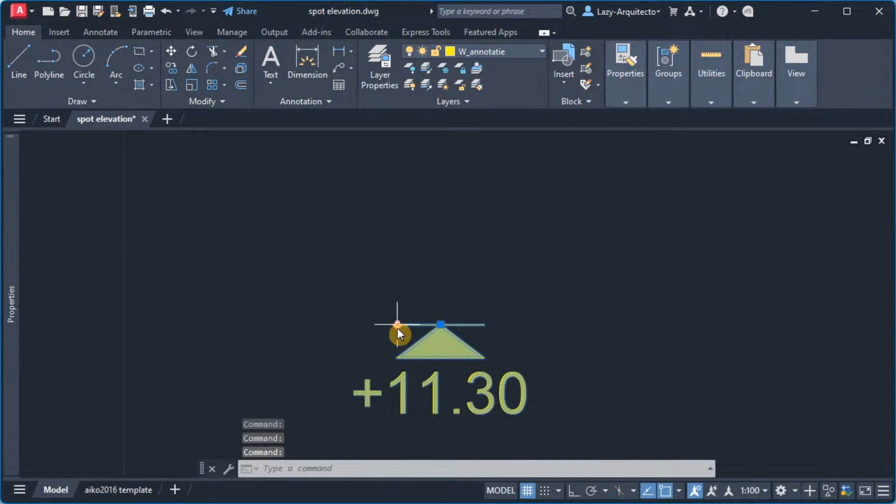Let's quickly see what this dynamic block does. We have a grip right here, okay so great, this grip is a flip parameter. That's nice, so we can quickly flip it without affecting the text. That's great, but...

The problem our friend was having is he needs to add a visibility parameter to change the scale of this block. So let's go ahead and open our block editor, by right-clicking on the block and picking Block Editor. And here we go, we are inside his block now.

So one of the first things I want to do here in order to quickly change the scale of this block is add a linear parameter from our Block Authoring Palette right here. If you don't see it, it's right here on your ribbon, you can also click on it to open it.

So again, my first parameter is going to be a linear parameter, and following the instructions on the command line, I'm going to start my first point exactly on the middle of the block, like so. Then I'm going to constrain this using ortho mode, and I'll place it — right now I don't know the distance, so I'm going to randomly place it right about here. And finally, I'm going to specify my label location around here.

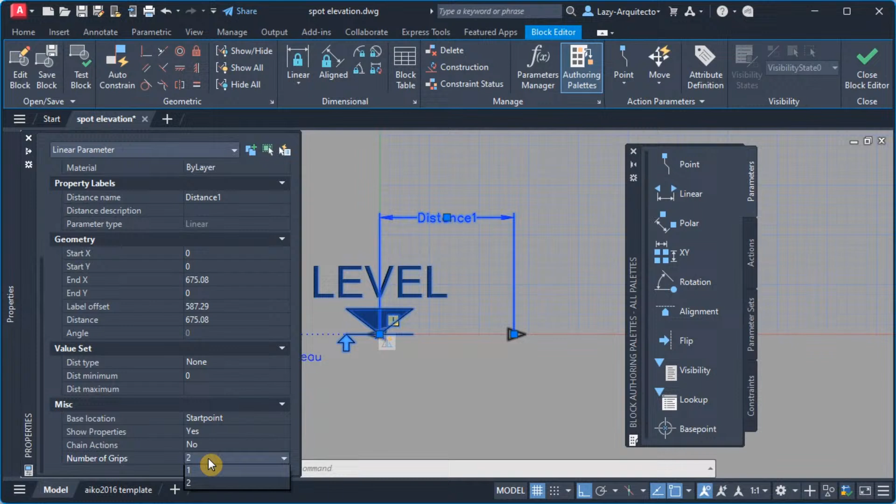Now, in reality, I don't need any of these stretching or grips right here, because we're going to control the size from a visibility grip. So what I'm going to do is remove these icons from my properties palette, and scroll all the way down to where it says number of grips, and change that to 0, as you can see. Now there's an exclamation mark here, and for folks familiar with dynamic blocks, it simply means this parameter is missing an action.

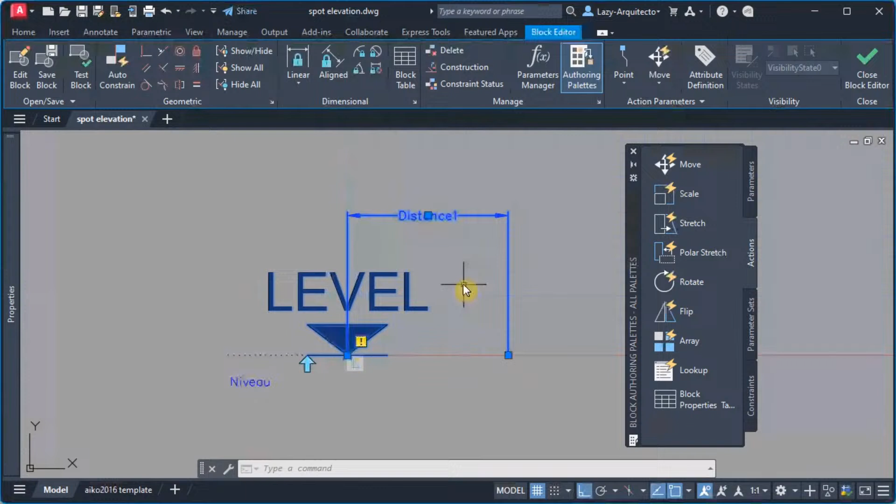So let's go ahead and add that action. I'm going to go under the Actions tab over here, and the action I need to help my friend Matthias is the scale action. Once I select that, I can follow the instructions and select my parameter.

And also select my objects, which are going to be all of them. And then I can, of course, press enter. You can see immediately that the exclamation mark goes away, and that's what we wanted.

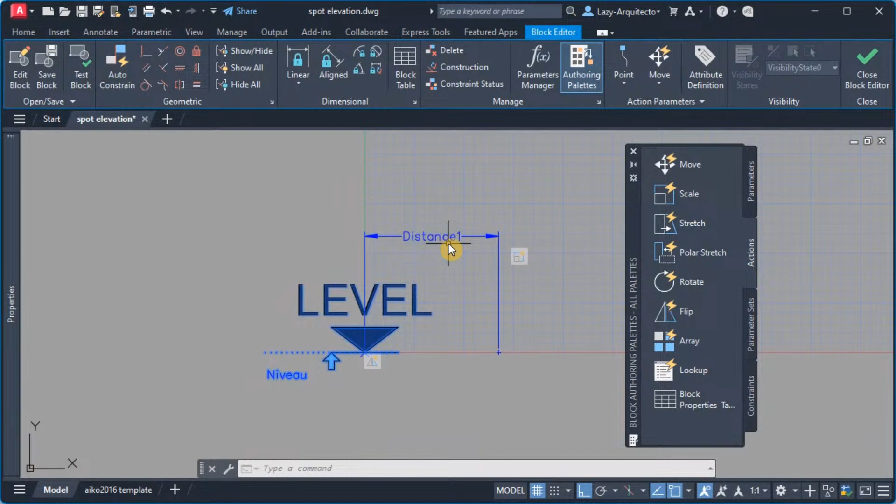Now, how can we add the visibility states to control this scale action, right? The regular visibility parameters won't work for this specific case. Normally, we would use this visibility, but we need a visibility option that can control the scale of this block, and this visibility doesn't have that power. So then what I'm gonna utilize is the parameter called lookup.

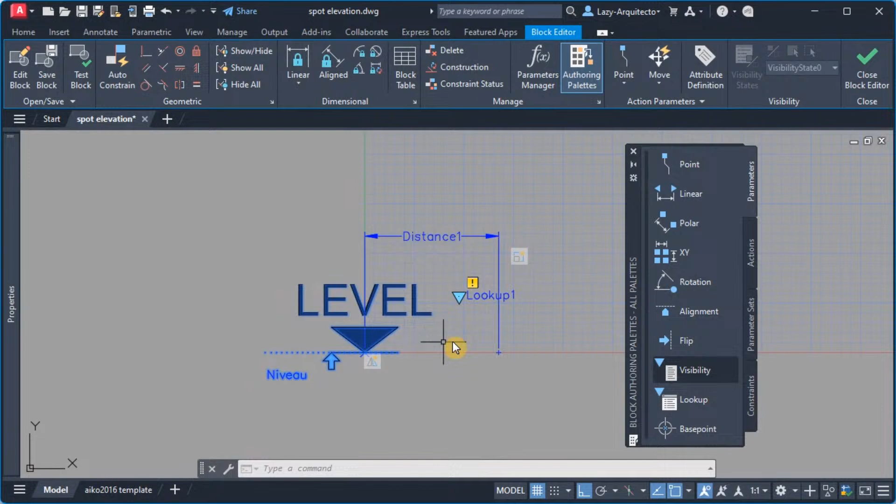So let's utilize that, and following the instructions, I'm gonna go ahead and specify the parameter location. So I'm gonna place it right about here, and here we go. That's the lookup parameter that we're utilizing to somehow trick AutoCAD and have that visibility option to scale this block.

Next, what I like to do is go ahead and right click on the scale action and simply modify the selection set. The reason why I'm doing that is because I want to add the lookup parameter under this scale action. So I'm going to do it by making sure the add option is selected and simply selecting my lookup parameter and pressing enter.

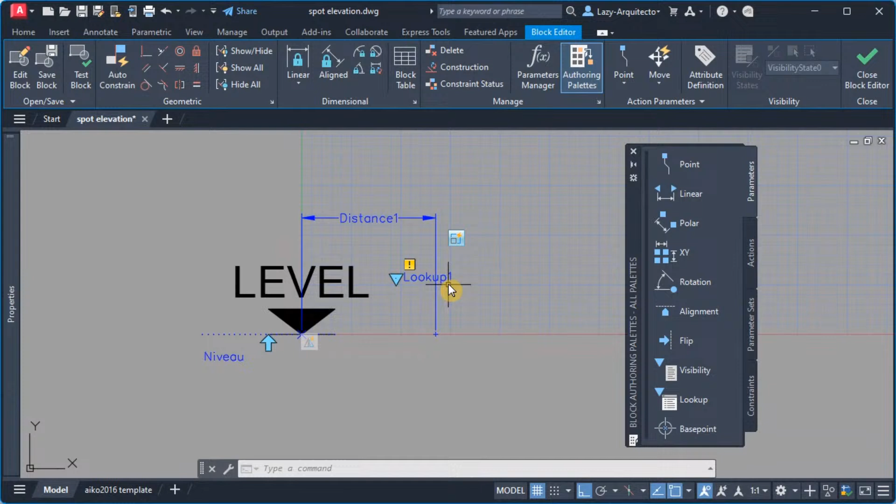Now, as you can see, we still have a small problem here where we have an exclamation mark under the lookup parameter. And again, that simply means this is missing something, and the thing that it's missing is the input. So in order to add some values, I'm gonna double click under the lookup table, and I can arrange this so you can see better.

All right. So now let's start adding properties to our lookup table. And the way I'm gonna do it is by clicking add properties. Over here, we have two properties, basically two different parameters that this block has. The flip, which was previously added by our friend Matthias, right? And the distance one, the linear one that I just included. So that's the one that I care about, and that's the one I'm gonna select.

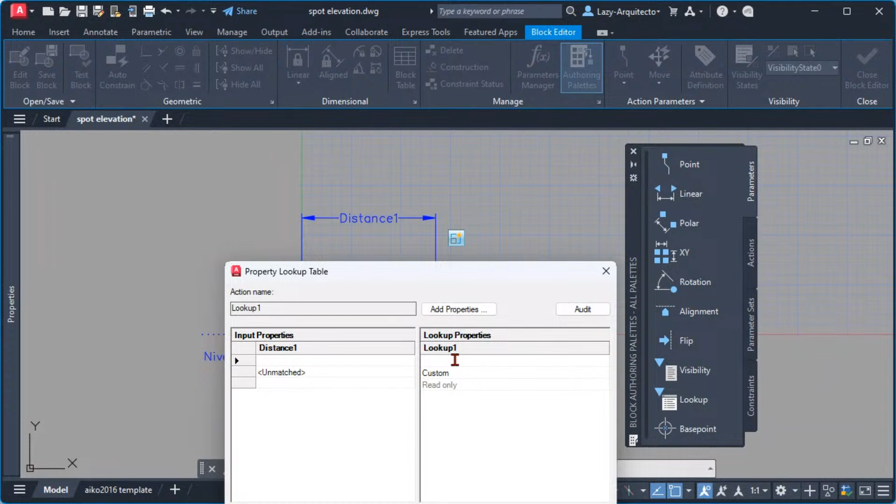And once I do that, look what happened now. We can input some values over here for the distance or linear parameter. And also we can add a name here to differentiate all of these distance values.

Now, pay attention over here because let's go back to our friend's question. And let me open that question from the folder so we can specifically address what our friend Matthias was requesting. Again, the reason why I picked this question was because this is going to be so helpful also for you and for other folks that want to simplify their life using dynamic blocks. So the scale that he's requesting is 1 to 50 and 1 to 20. All right, so that's very important.

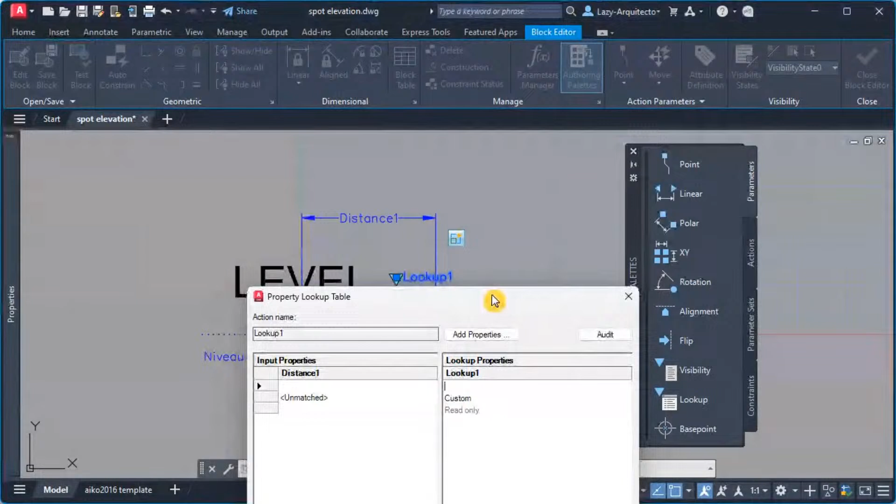So the first thing I'm going to add is the names of, in this case, the lookup or the visibility that we can pick. So 1 to 20. And then over here, we can add the size for the scale that we want for 1 to 20, right? So in reality, under these drawing scales, 1 to 20, of course, would be 1 unit in model space would be 20 units or 20 times the size in paper space. So that's what I'm gonna do here.

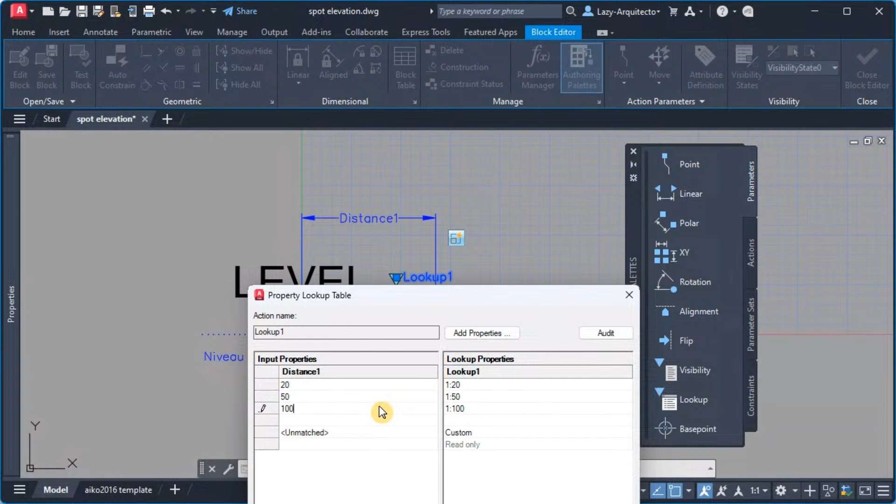I'm gonna say 20 for the scale action to work, and then over here for the 1 to 50, I'm gonna of course say 50, right? And we can keep adding over here. Our friend only requested 2, but I'm gonna add one more, 1 to 100, and then of course the scale would be 100 right about here. Okay, now let's see what happens when we hit OK.

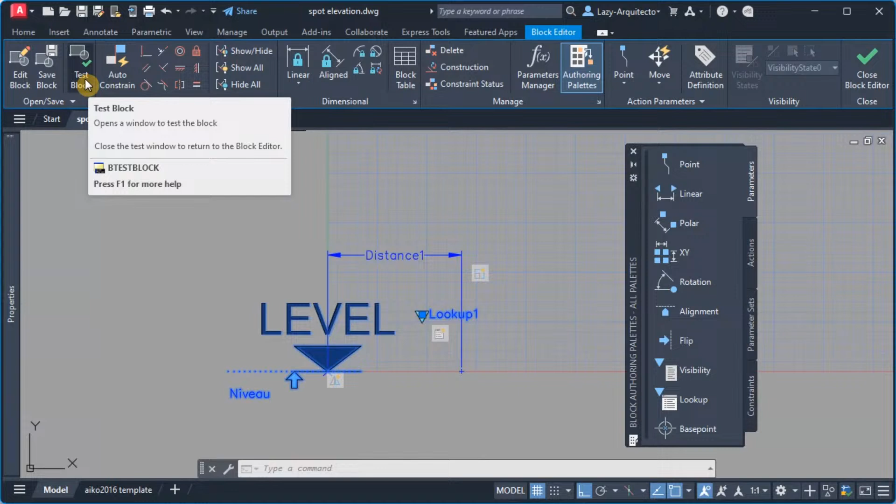All right, so we can see immediately that the exclamation mark went away for the lookup, which is a good sign. Now, before proceeding with this block, a good practice is always test your block. You don't want to keep adding parameters and actions and then realize there is something wrong with your block. It will take you so much time to find the mistakes. So let's go ahead and test our block, see what we did so far.

And I'm gonna select the block, and then you can see a visibility grip shows up. In reality, this is a lookup. It's not a visibility, but it works as a visibility. So I'm gonna click on it, and now we have all of these different options. So I'm gonna hit 1 to 20, and you can see the size change. Of course, if I hit 1 to 50, it would be also bigger, as well as 1 to 100. Now let's test this flip also, and it's working as expected.

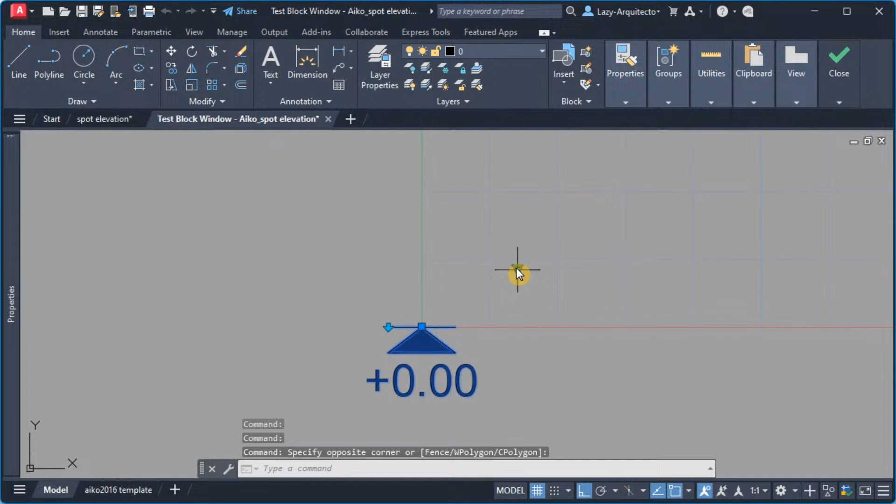Now there is a small problem right here, and the problem is this custom option right here, that if we click on it, it looks like nothing happens. But this might be something that many folks don't know how to get rid of, this custom option under the lookup table.

And let's resolve that for you and for other folks. Let's go back to the close test block. In order to fix or modify a lookup table, what we need to do is simply right click on it and say display lookup table. That's the only way. If you double click on it, it won't open.

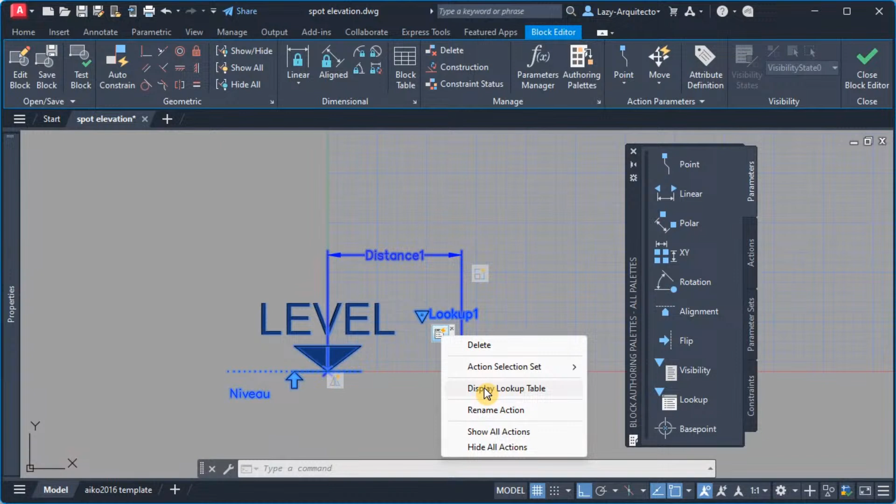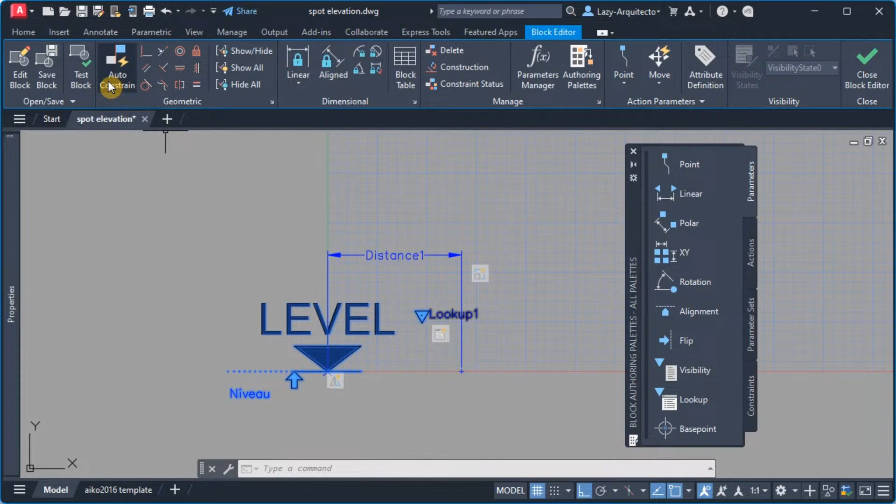So over here, you can see that's the custom option that we have. Of course, if we try to clear this, we can erase that. But look what happened when I clicked OK. I'm gonna test the block, and you can see now that the visibility grip went away, and that's not what we want. So let's quickly undo that. I'm gonna do Control Z a couple of times.

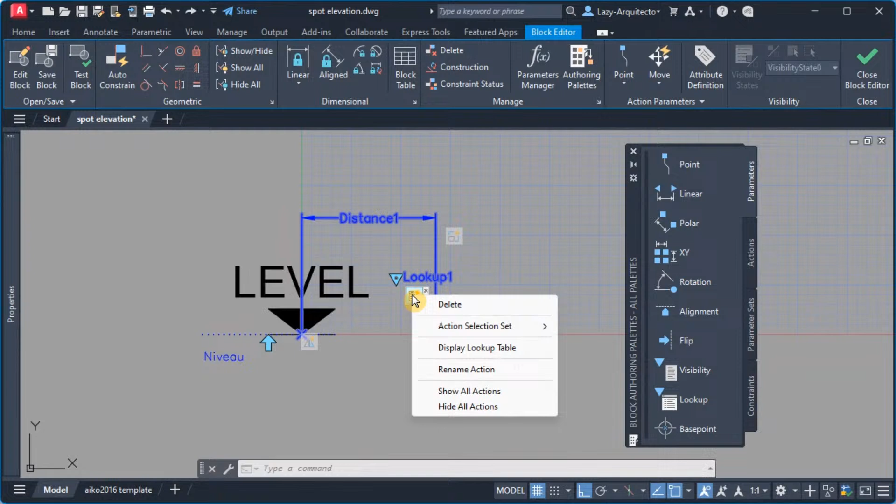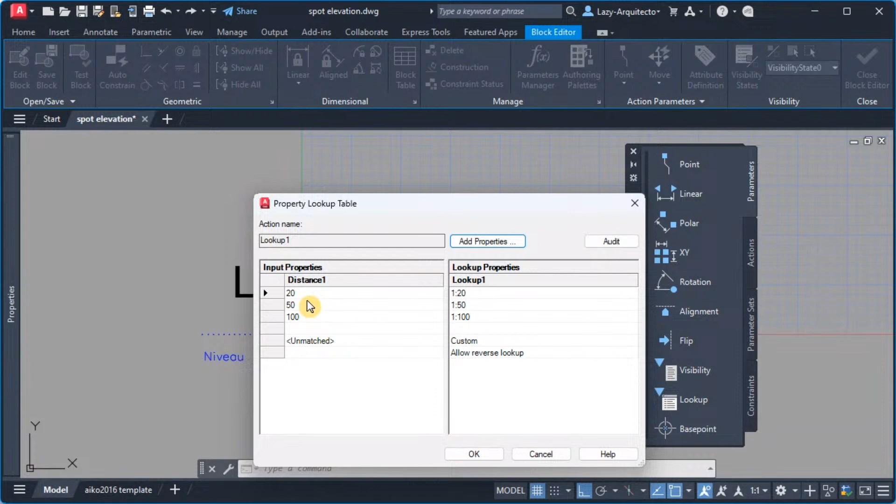The way I'm gonna fix the custom option, I'm gonna again go to my display lookup table. That custom is back. The reason why custom is showing is because this distance parameter over here has a random size. And the lookup table is smart enough to recognize that and is giving you a custom visibility right here. So if we know that, what we can do is simply pick one of these values for the distance, so 20, 50, or 100. I'm gonna go ahead and pick that.

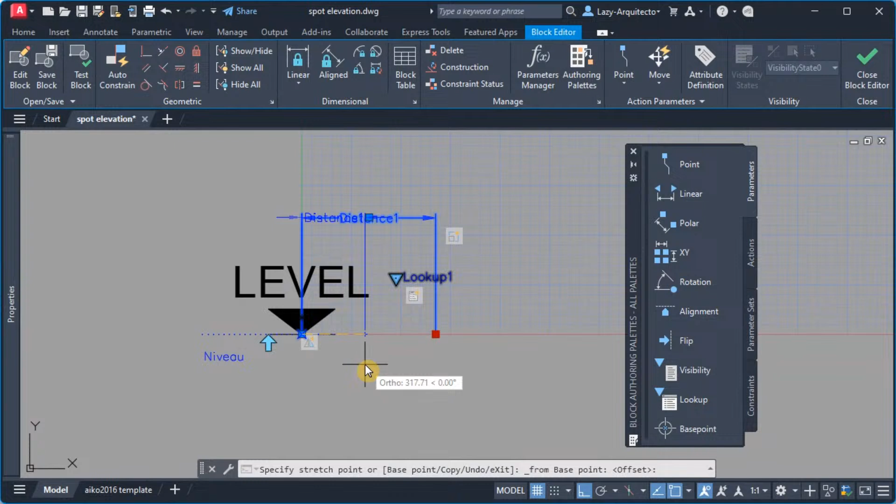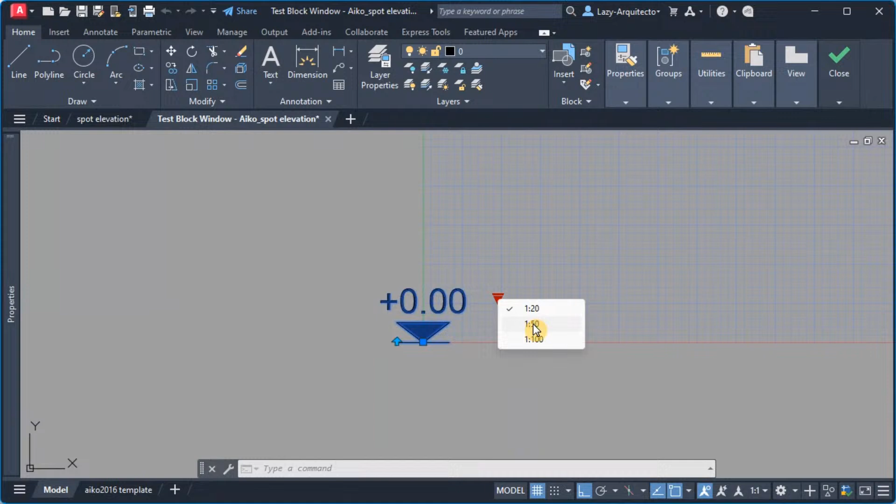I'm gonna click my linear parameter, and holding shift on my keyboard, I'm gonna right click and say from, and from this point I want 20 to the right, and press enter. And look what happened now when I test my block and select our grip. Boom! The custom option went away immediately. This is because our linear parameter now matches one of these numbers and the custom option doesn't need to be there anymore. All right.

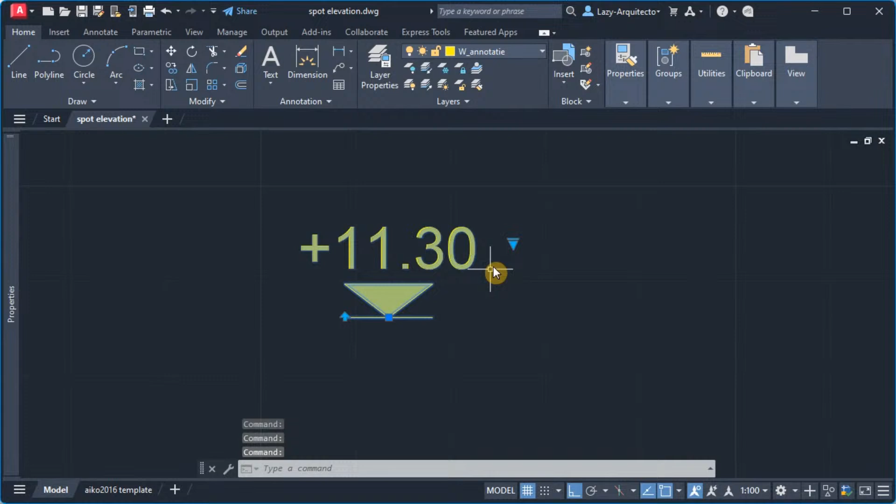So again, let's quickly test our block, and it's working beautifully as you can see. I'm gonna close my block editor and save the changes, and now we have the final block right here with the correct visibility states, as our friend Matthias was requesting.

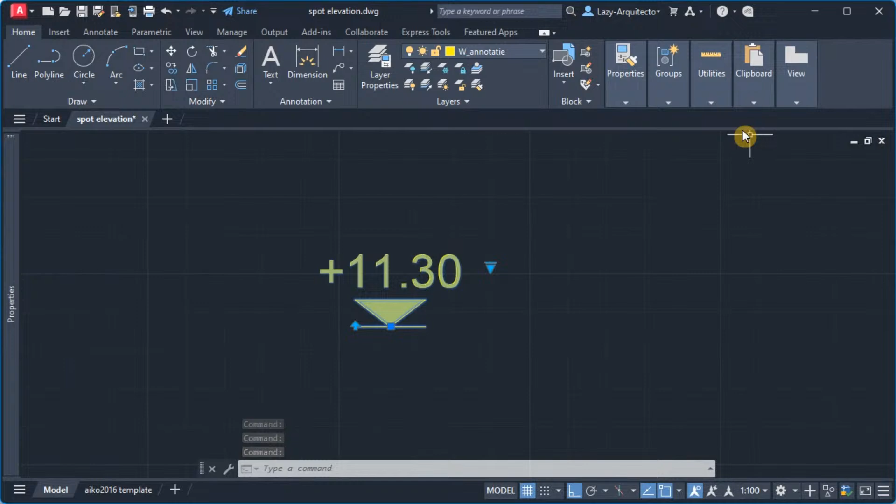Awesome. So let me know on the chat what you think about this way of using lookup tables to change the scale of our blocks quickly. Let me see what you guys think. Our friend Armando is in the chat. So what do you think about this way of using lookups to kind of emulate visibility states in dynamic blocks?

Armando is on the chat. Armando says, "Hi, boss, I'm here. What are you teaching?" Hey, Armando, it looks like you missed the entire presentation. Oh my God, you lost important information, my friend. Anyway, maybe you can watch the recording later. Hope you're doing great, Armando.

Maria says, "It is super." Hey, Maria, I'm glad that you found this presentation useful. That's why I picked this question from Matthias, because I realized more people need to know this. It's not just me trying to save my time; whenever I'm saving time in AutoCAD, I like you to save time too. Douglas says, now that is very useful. Hey, Douglas, I'm glad you also believe this is useful. That's why I'm sharing it. And that was a great question again from Matthias.